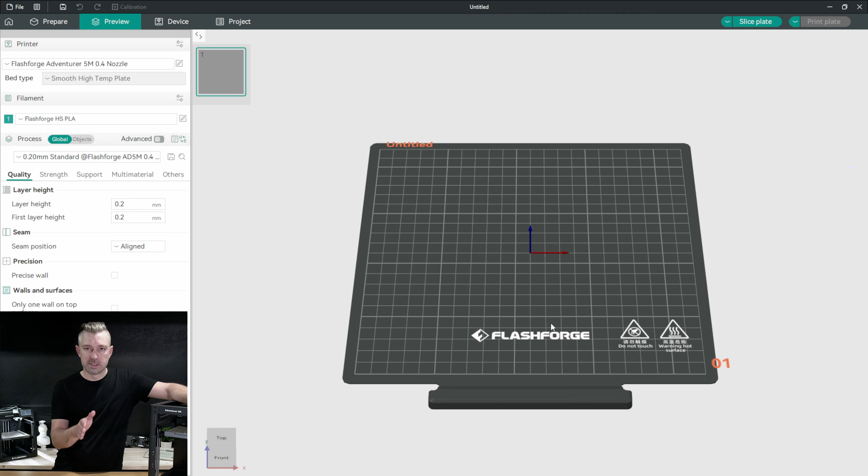Now I've already done that, so it's not going to ask us. But you can see, once we go to the Device tab, this printer is in this version of the slicer, and we can even hit our local files and see all the files right here that are freely available for me to print directly from the slicer. If you have a camera set up, you should have access to this camera view. This is easily the easiest way to get the printer into a slicer.

Now, if you don't want to make an account with Flashforge, but you still want to use the machine in Flashforge's version of Orca Slicer, we can still do that. To do this, we just need to go to the front panel of our 5M series 3D printer.

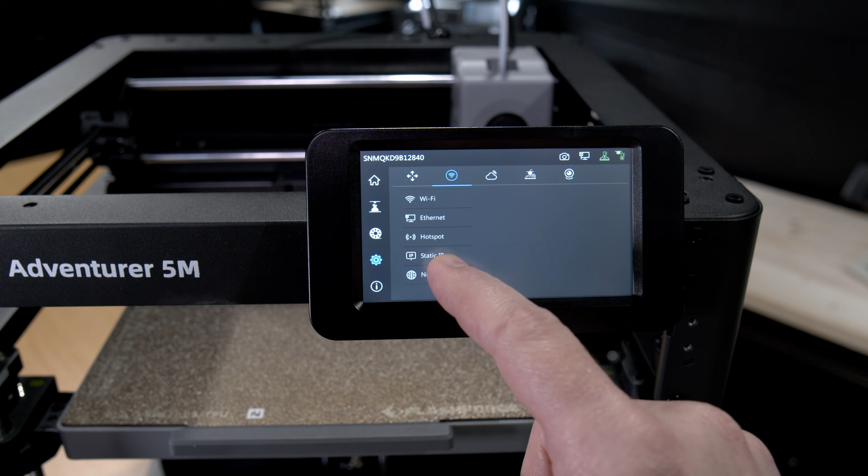Once you're there, go to the settings option and look for the network icon or the Wi-Fi icon. At the very bottom of this menu, you should see an option for network mode. Once there, we just need to enable LAN only mode. And there's a code at the bottom of the screen. Make sure you either write down this code or take your phone and take a picture of it, as we're going to need this in our slicer.

At this point, it's also a good idea to go back to your network settings and go to either your Wi-Fi or your Ethernet option. If you're plugged into Ethernet, use your Ethernet option over Wi-Fi. You'll want to take note of the IP address shown in either of these two windows. And for the record, don't be worried about this address. This is an internal IP address and nobody can really do anything with it, as they don't have access to your internal network, or shouldn't.

Now we're back in Flashforge's version of Orca Slicer, and you can see here that we're not logged in with an account. But what we can do is go to Devices and then Add Printer, and look for the name of our device. We can see this one right here is on LAN, so we can click this to add this printer to the slicer.

Once we select the device that we want to add into the slicer, you see that it's now asking us for the code that we need to use for LAN only mode. So I'll go ahead and copy that code directly in here. Once we hit accept, you should see that that printer is now available in LAN only mode without communicating to the Flashforge servers. Now that our printer is in the slicing software, we just need to go over to prepare.

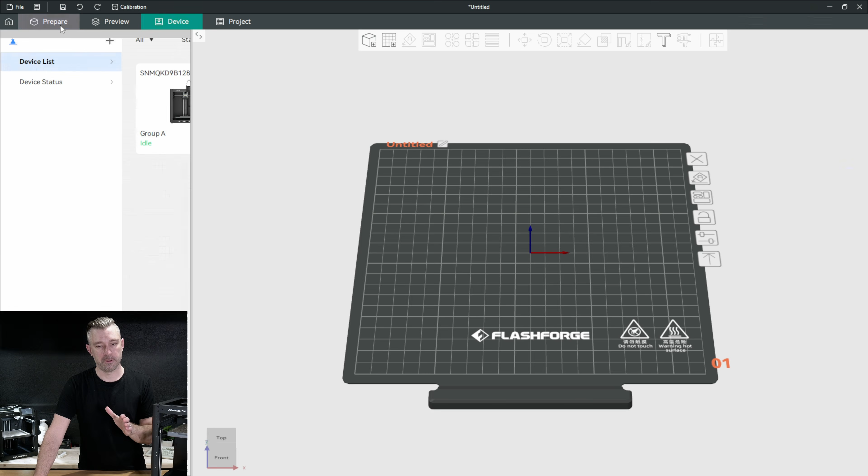Once we're here, we can drop any files that we want into the slicing software and hit slice plate. Now, I'm not going to go over all the different settings and everything in the slicing software; I'm just showing you how to connect the printer to the software itself. Once we've sliced our file, we can hit print plate and you see that it gives us a list of printers connected to the software to send our files to print.

So we'll go ahead and send this to this printer here. And just like that, you can see our printer is now preparing the file to print that we just sent over from the slicing software.

The second method we're going to use today to get the Adventurer 5M into slicing software is to use the official Orca Slicer branch itself. Keep in mind, there's only one official release source for Orca Slicer. And you shouldn't go to Google and just type in Orca Slicer and open up orcaslicer.net, as this is not the official release source for the slicer.

I'll have the release source in the description, but the key note is you want to make sure that you go to the GitHub for the project itself. Once you've installed and opened Orca Slicer, you'll notice that this screen looks quite different. There's no login options or anything else. We're just greeted with a new project or open project. So what we want to start by doing is go to Create New Project.

You can see here in the printer profiles that we don't have anything for our Flashforge machines. This is a very important note. We need to pull in a new profile for the Flashforge Adventurer 5M. We do not want to hit Create Printer. This would create a blank profile that has none of the settings required to run your Adventurer 5M.

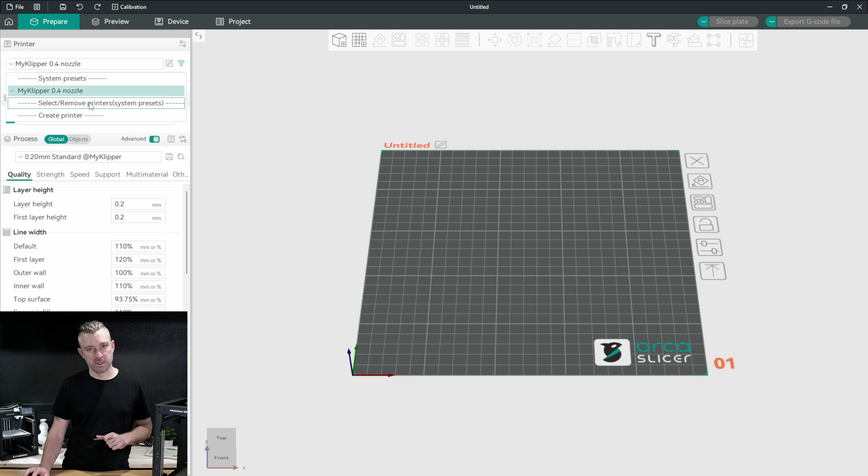Instead, what we want to do is go to Select Remove Printer. Once there, a dialog menu pops up asking you to select the different printers you may have. All we need to do is go to the device keyword and type in Flashforge. Once there, you can select the nozzle and the printer for what you'll be adding.

Now, I just added this Adventurer 5M to the other slicer a second ago. So I'm going to add the 5M Pro with a 0.4 millimeter nozzle and hit confirm.

Now, I've already used this slicer before, so it didn't ask me a question that it's about to ask here. It'll ask me to select the filaments I want to add for this printer. You can just go through and select the different filament types and variants that you want profiles for the printer you're importing.

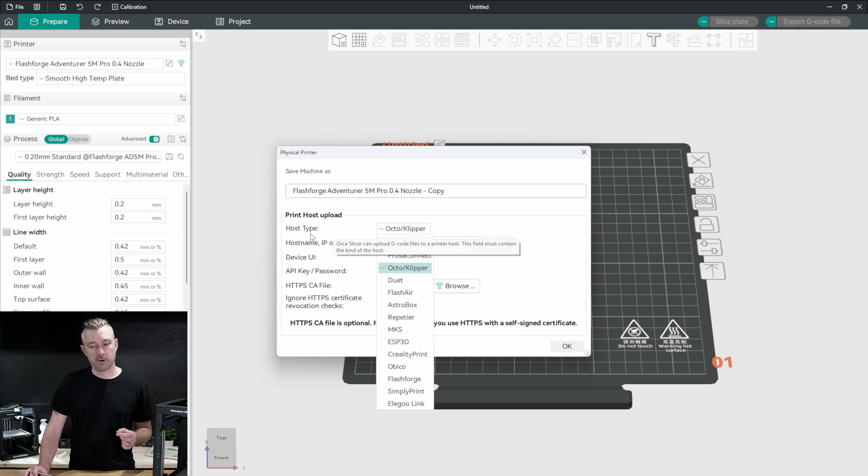Now that we've selected the pre-made printer profile and the different filaments we want included, we need to change the device profile. We do that by clicking the Wi-Fi icon, and we need to drop down right here on the host type, and we'll go down to Flashforge.

This is a very common mistake that people think because it is a klipper machine that they want to use some of the other options like Octo Klipper. We don't want to do that. We want to make sure that we click on Flashforge.

Once we're there, we just enter the IP address of the machine. And this one is 10.1.0.252. Again, this is an internal IP address, and you don't need to worry about leaking this to anybody, as anybody can't really do anything with it.

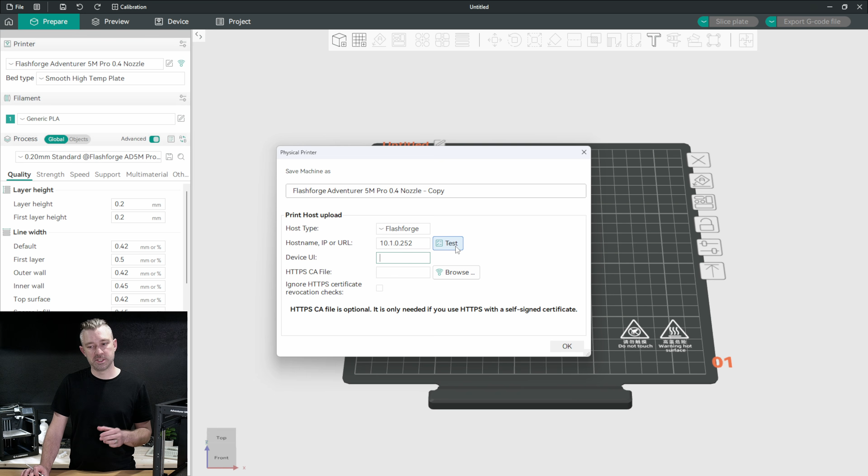Once we've input the IP address into the hostname IP field, simply click the cursor out of that field into the device UI. This will unlock your test option. Once we click this, you'll see that our connection to the Flashforge is correct.

Now that we know our connection to the machine is working, we want to go ahead and add an option to the device UI field. Keep in mind, this is only if you have a camera on your Adventurer 5M. So I'll go ahead and copy that into our field now.

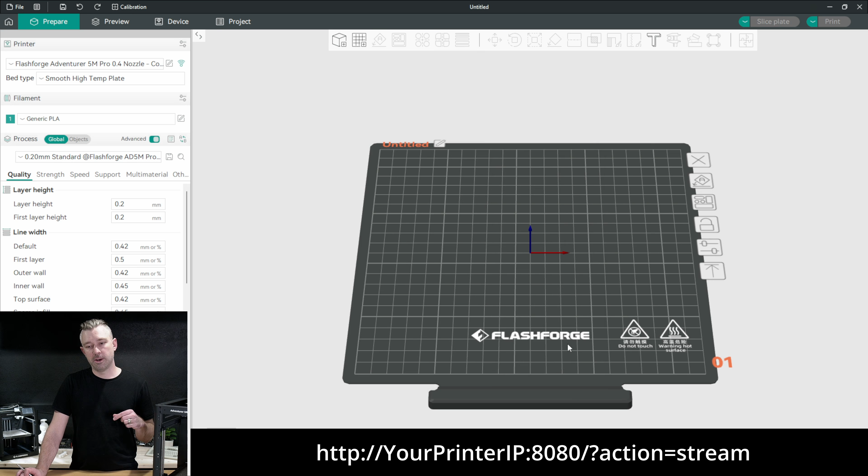Once we have that, we can hit OK, and now we can go to the Device tab, and you'll see that our camera is showing in the Device tab for Orca Slicer. For the camera, all we've done is taken the stock stream URL from the Adventurer 5M and made sure to put it into the Device UI field.

I'll make sure to have this option on screen for you to look at. All you need to do is replace the text that says your IP with the internal IP address of your machine. Now that we have our printer in Orca Slicer, we can go ahead and drag a file in just like before and hit Slice Plate.

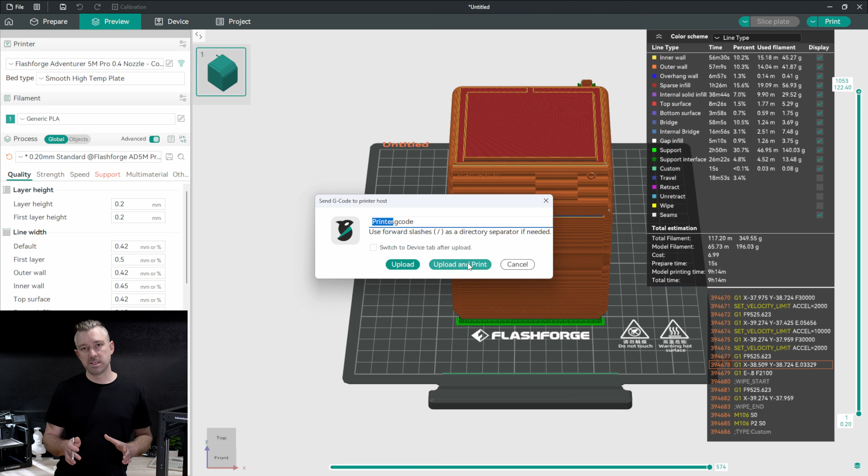Once the slicing's done, we can hit Print, and you'll notice that it looks a little bit different. This isn't asking us to select any printers or anything like that. Well, Orca Slicer is a little bit different from the Flashforge variant of Orca Slicer, as each individual printer profile is tied directly to its host or IP path. So it knows automatically where you're going to send that file as it's tied to the profile of the printer.

In the future, we're going to talk about different options and settings in slicing software. But for today, we're not going to do that. The most important thing for you to do is to be able to connect your printer to your slicing software so you can begin printing.

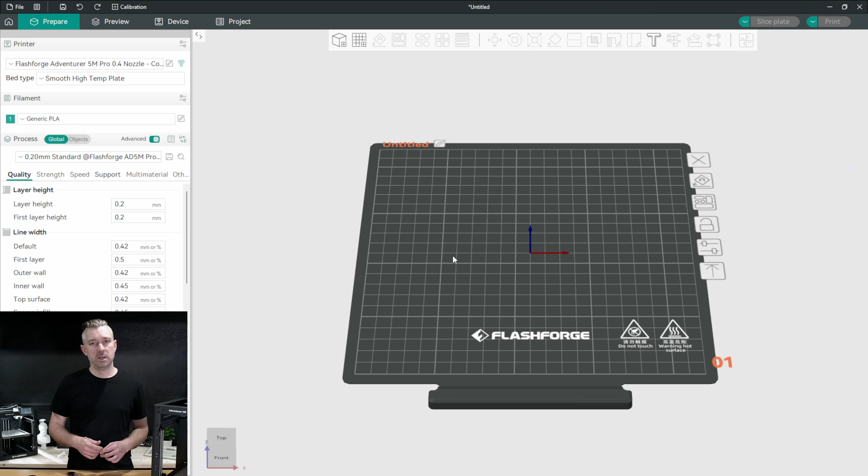If you're new to 3D printing, don't be overwhelmed by all the different options and settings in your slicing software. Realistically, all you need to do is make sure that you have your printer selected in your printer profile, and then go down to your filament options and select the filament for the type you're going to be using. If you are using a model that has overhangs or arms or anything protruding off it, simply go to your support settings and hit Enable Auto Supports.

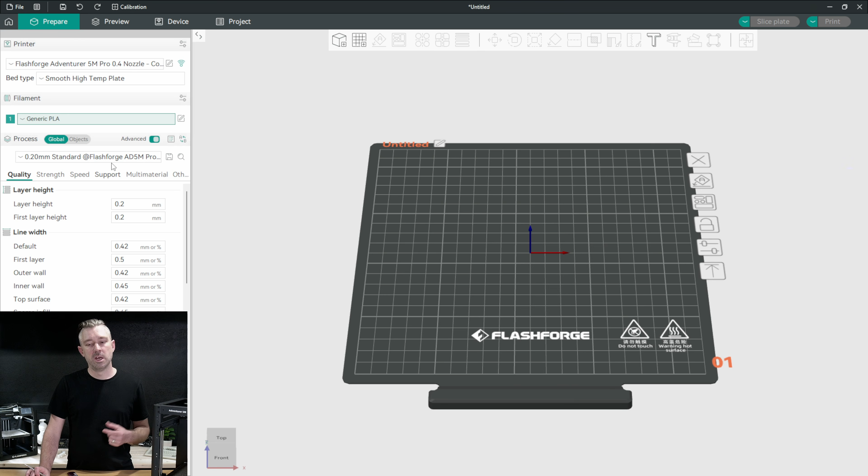You can go down here, and it is recommended to use Tree Auto. Then, once you're done, hit Slice and send it off to your printer.

So in summary, don't worry about all the other settings. You're not going to master 3D printing overnight, and odds are you're going to have your fair share of failures. But that's not the point. The point of this video is now we have you connected to your slicing software, and you can begin making those first steps into 3D printing.

Now that your Adventurer 5M is connected to your slicer, it's time to start printing.